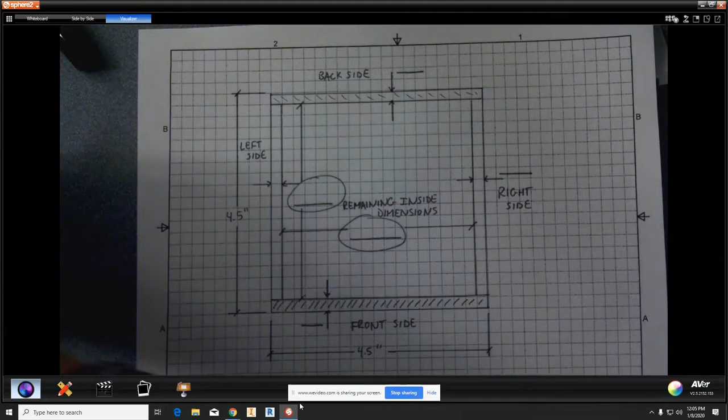All right, so now that we have designed the majority of our box, the base and the four sides, what you need to do now is start thinking through how to dimension the top of your box. All right, so that's this 3D printed part right here. So in order to do this, a few kind of just guidelines or rules.

The thickness of the plastic, I don't want it to be too thick, otherwise it's going to take a really, really long time for you to print yours. The thickness, I want you to set as 0.20 inches thick.

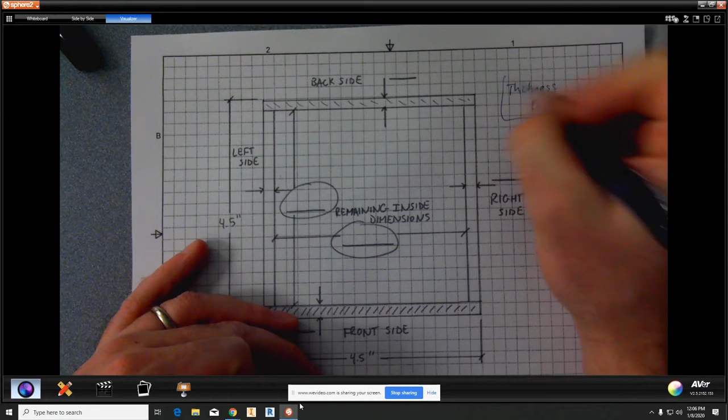All right, so when you do that, the other thing you need to keep in mind is when you start designing your top, it needs to have some way for your speaker to actually mount successfully here, because you see mine is not very well designed. I could have made this circle a better diameter to actually meet up here, so this is a bad example.

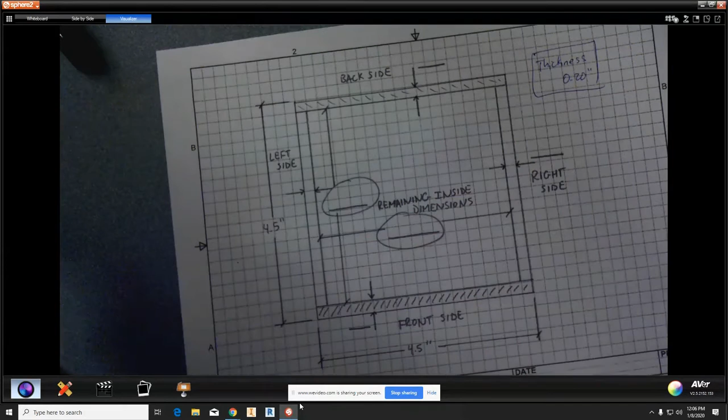What I want you to do is make sure that you have a way to securely attach your speaker to your top, because that's what's really going to secure it in place. All right, so this could have been a much better design piece here. All right, but the other thing is it needs to fit nice and snug into the speaker box.

So because of the thickness of the materials, it's actually different dimensions this direction than it is in this direction. And you see that depending on how I have it in here, this is actually the correct orientation, whereas this way is incorrect. It doesn't really fit well. It's too short on one side and it's too long on the other. All right, so it is important that you dimension this correctly.

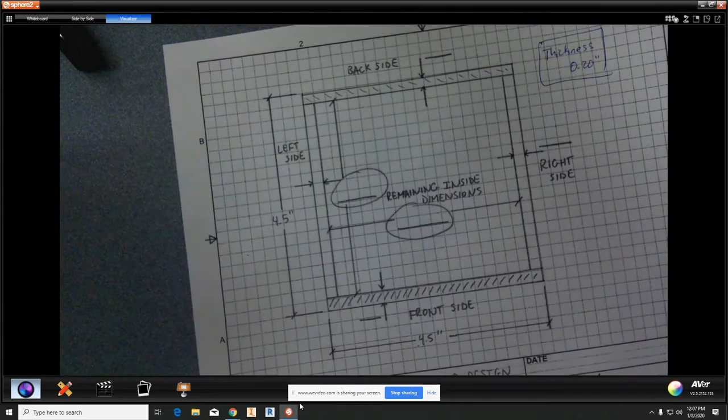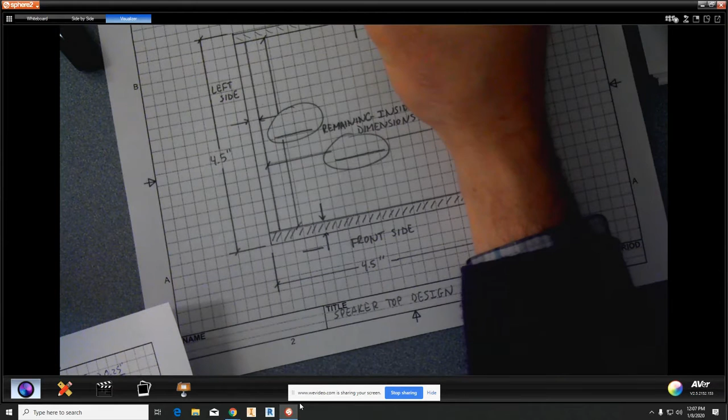So what I mean by that, the way my box is designed, it's like this. So if you go back to our layout, I have wood on the back, HDPE on the left. On the front, I have acrylic, and on the right, I have the expanded PVC. So the back side, I have wood, which is 0.20 inches thick. On the left side, I have HDPE, which is 0.25 inches thick.

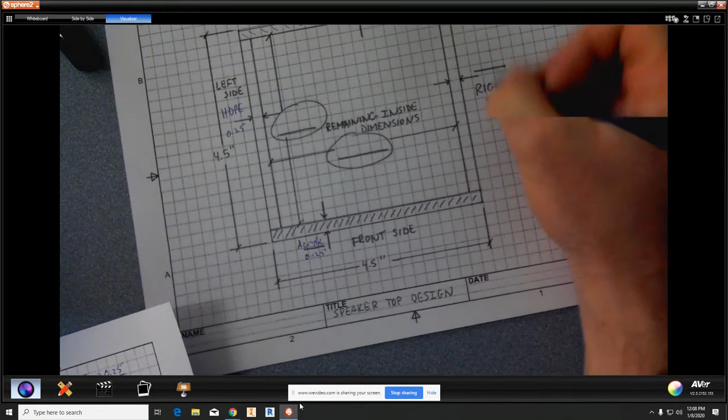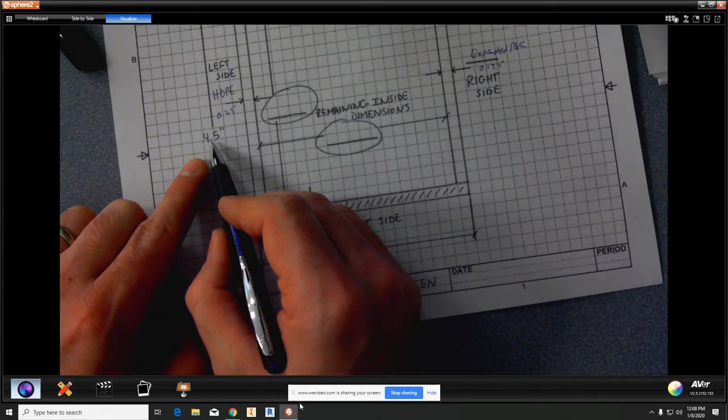On the front side, I have acrylic, which is 0.125 inches thick. And on the right side, I have expanded PVC, which is also 0.125 inches thick. And so when I do the math, the total box outside dimension is 4.5 inches. I have to remove the thickness of the material. So for this dimension, I have to remove 0.25. So that brings it down to 4.25. And I have to remove another 0.125. So that remaining is 4.125 inches in that dimension.

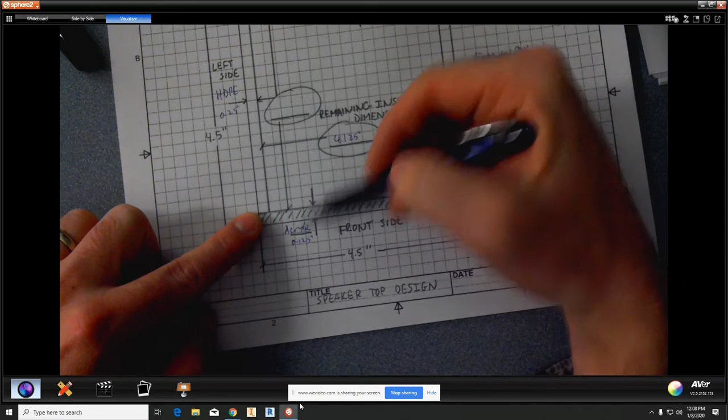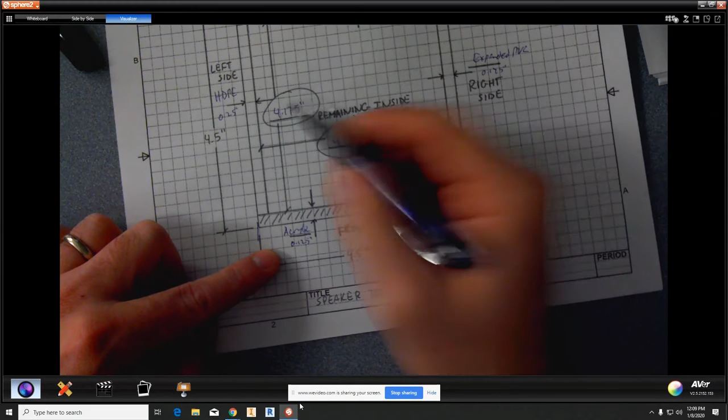All right, and then this dimension, again the outside dimension is 4.5. I have to remove the thickness of the back, which is 0.2, so it's now 4.3 inches, and then I have to remove the 0.125. So then it's 4.3 minus 0.125, so I have 4.175. I'm doing that quickly off the top of my head, so if my computation is a little wrong, I apologize. But the point being, you see that these numbers are not the same.

All right, so that's why it's important to make sure that the design of this top is done correctly. The other thing you want to keep in mind is that when we put the fabric on, the fabric does have thickness to it. All right, so you need to be careful that you can actually wrap the fabric a little bit, and I still haven't cut out the last little bit here, the little notch, but you see that I've got a little lip here.

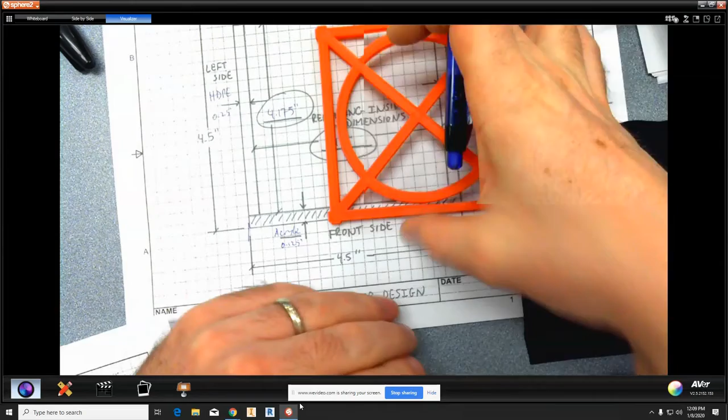So if I put it this way, this outside dimension from here to here is 4.175, and then I backed it off about 0.05 of an inch, so that's kind of like the thickness of the material, so I can wrap it, and it should still stay nice and snug and fit in the box.

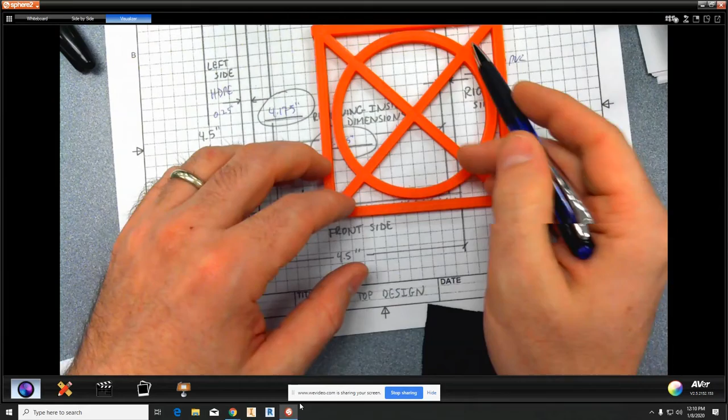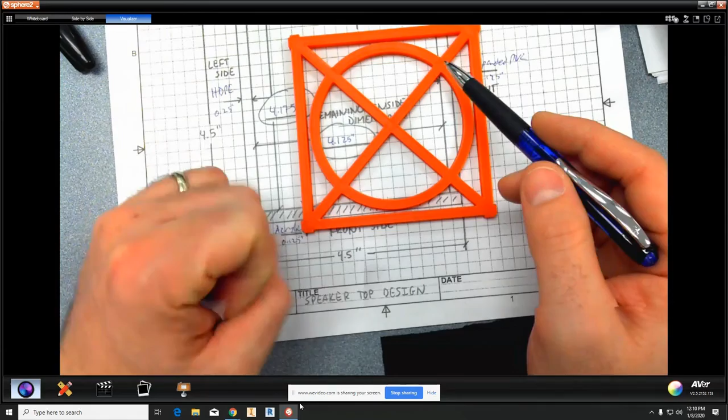All right, so there's a lot of stuff, and then you can have any design in here you want. Try to leave as much open space so you can allow the music to come out. So you want to have some kind of interesting design. Again, this is just a very basic X for kind of bracing, and then a circle that I intended to fit my speaker, but I just kind of made it up real quick as an example. It didn't quite fit, so I want yours to be better, more accurate. All right, so make something that will house and attach the speaker and act as a top to your speaker.